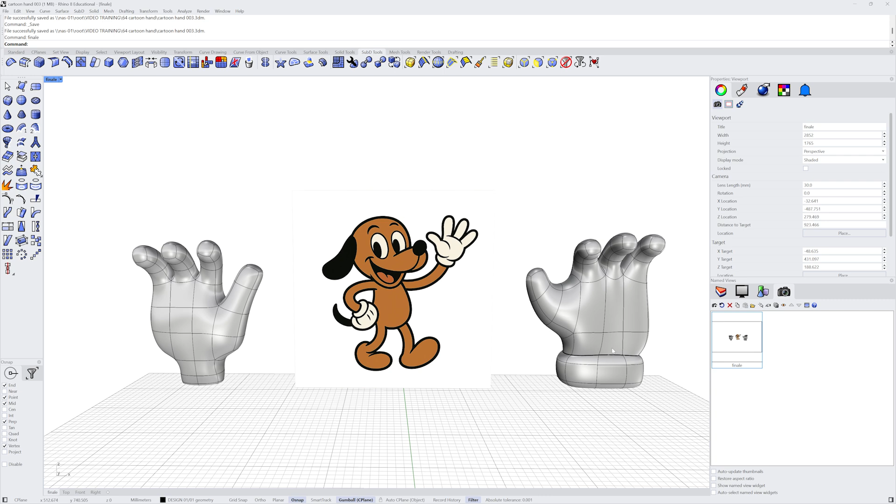Okay, here's the overall character. This is, if you're curious, a style called rubber hose, which began in the 1920s and 30s. Of course, we're just going to focus on that glove. So let's zoom out. So here's two examples of hands. The one on the left is just the basic wrist, and the one on the right has that cuff that we will be building. And it's kind of fun, if you hit the tab key, just to see how simple it really is, kind of under the hood.

So before we get started, I'd like to cover the strategy and commands. We're just going to use two simple commands. We're making a primitive to start off with, and then it'll be a series of extrusions. Now the strategy here is all about the repetition. We're going to be grabbing one face at a time and then extruding. Then we'll be either scaling, moving, or rotating, or all three to get it into the correct position, and then repeat that move. Don't worry, it'll be quick and fun.

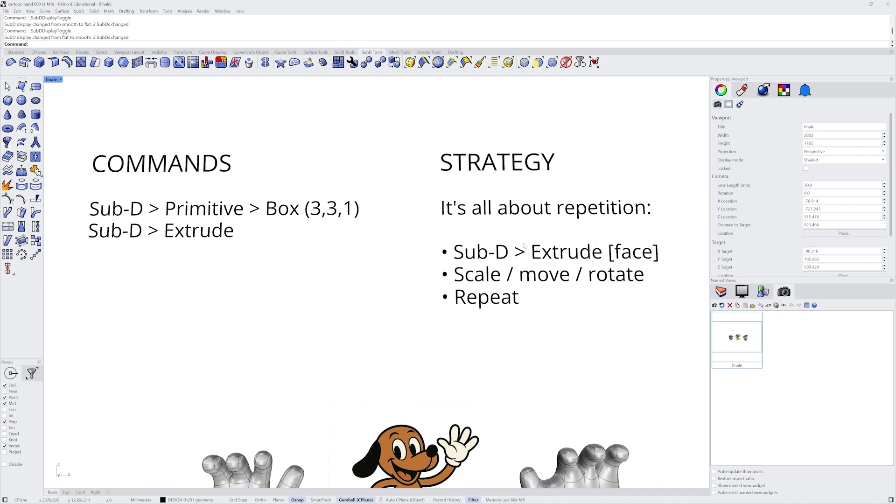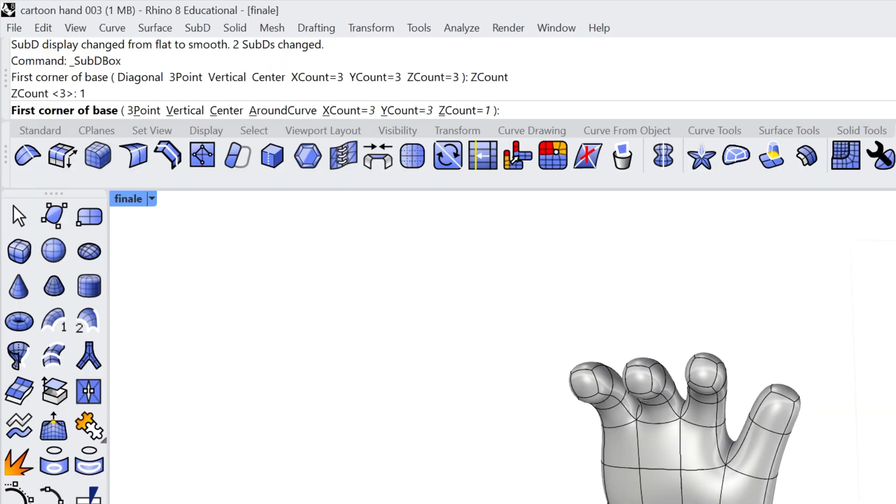So let's come down to the workspace, and I'm going to use the sub-D toolbar and go over to get a basic box. Now I want the X count to be 3, the Y count to be 3, and the Z count to be 1. We're going to make this a flat hand. Okay, we'll just draw the hand anywhere is fine. Kind of get it centered though. We're going to go up. And there's our basic 3x3x1 box. Okay, I'm going to shrink this down a little bit, give ourselves more room to work.

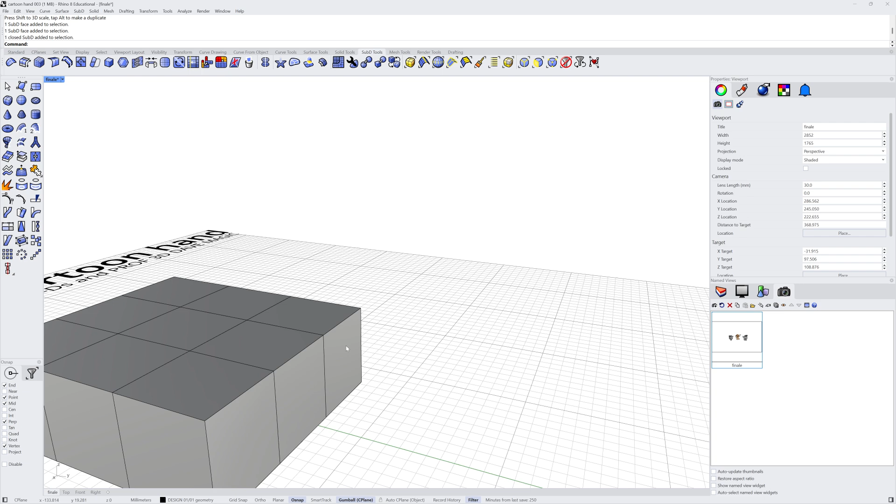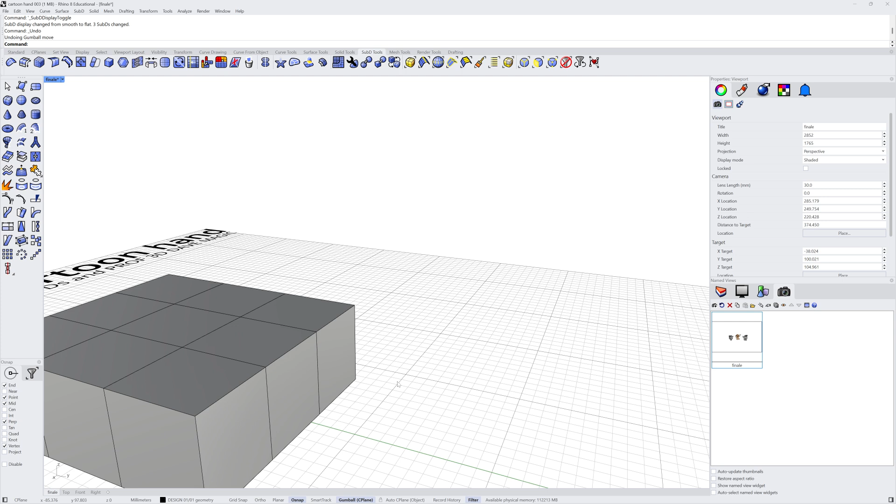So the process is pretty straightforward, as I said. We can select the whole sub-D at once, like I just did, by clicking anywhere. But this is going to require some finesse. We're going to select what's called sub-objects. There are three kinds. There is the vertex. You have to use Control and Shift, and that's editable, and it can move things around, and undo that. We also have the edge. That can be moved, scaled, or rotated. There we go. See how it looks. Control Z to undo. Or the face. So vertex, edge, and face. Control Shift picks the face.

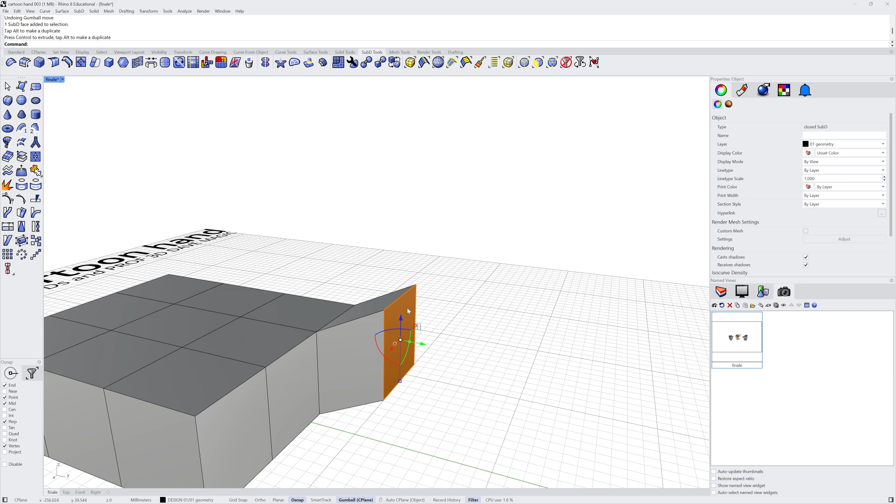And we're ready for our first operation, which is an extrude. Now I'm going to pull these out roughly in a cube form. That keeps it relatively round inside. So after the first extrusion, we want to have the hand curling a little bit. So we're using the move, which is the blue arrow. And then I'm going to rotate just a bit, and that's the red arc. Now notice how it gets a little bit wider. So we may want to scale it in just a little bit. So I'm using that scale there.

Okay. If you're doing this and following along, my gumball is automatically rotated to align with the face. Let me show you where that setting is. So that's align to object. So now it sticks with the face as opposed to realigning to the construction plane.

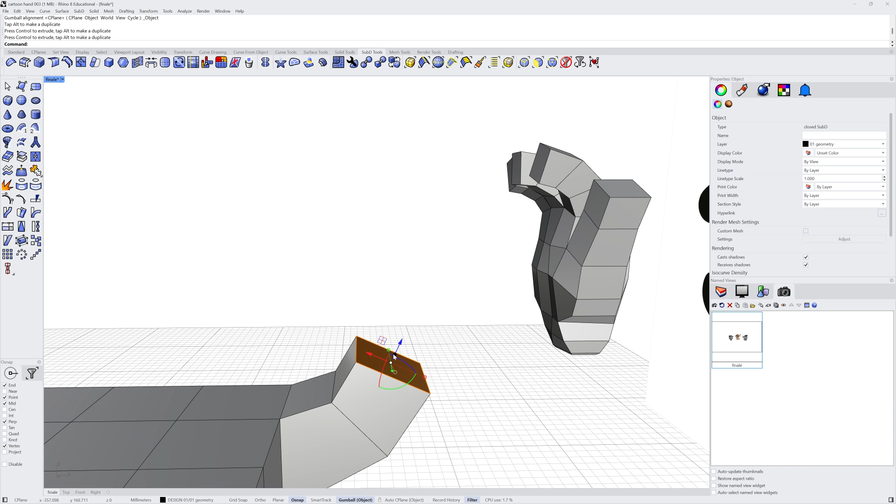Next, extrusion. I'm going to keep it kind of short. And as I said, we're going to do a little rotate. That was a move. And I'm going to have this basically 3 segments. We'll align it. So one more. Bring it over. Arc to rotate. Is that still square? All right, let's see how that first finger looks.

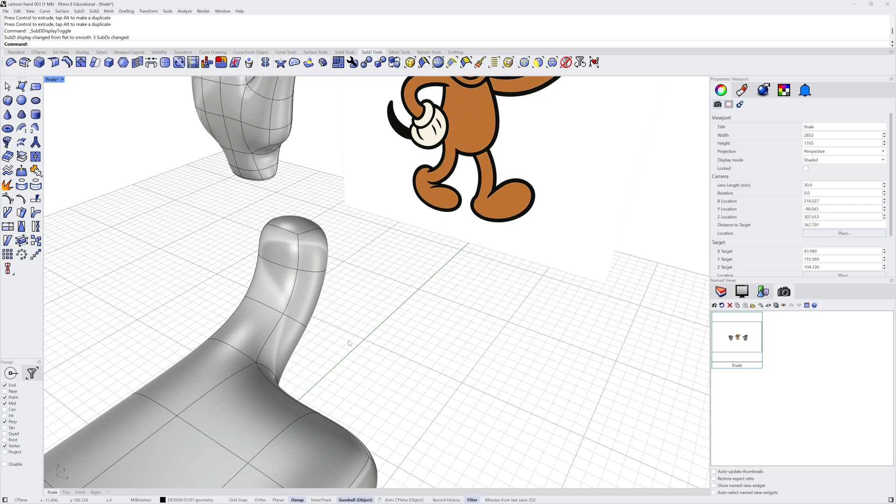Not too bad. Okay, I also like to do these one at a time because if they look too similar or symmetrical, it's not going to be an organic shape. So we'll just keep moving on one by one. That's the way it goes. So this can come out a little bit farther. It's the middle finger. So that was an extrude. Here's a rotate. I'm going to pull it out a bit. Maybe a little more rotate. And maybe scale it in a bit.

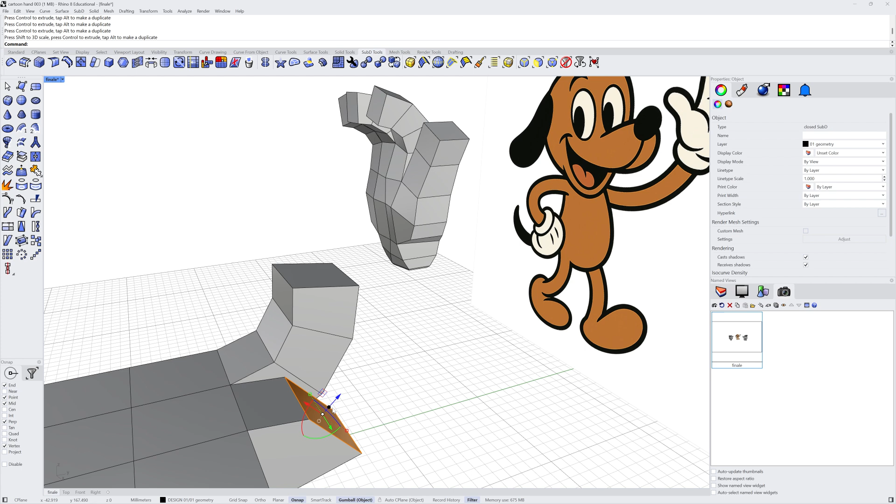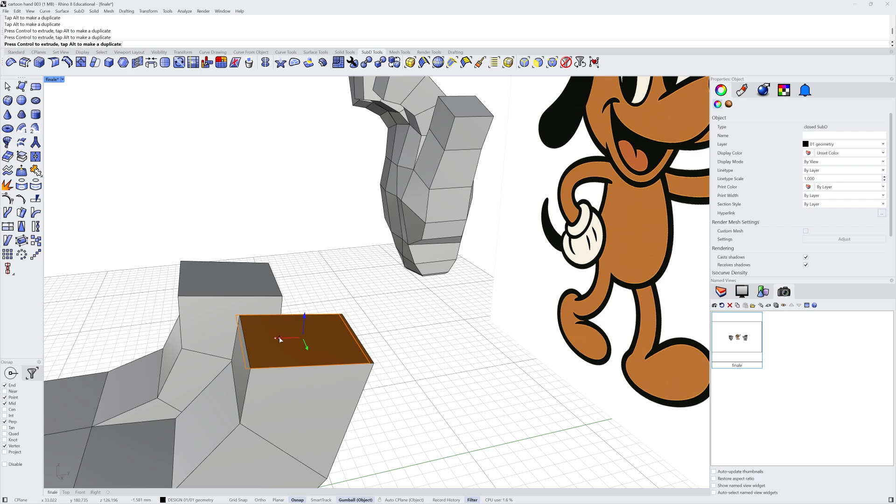Okay, let's keep going. Again, make this one just a little bit bigger and a different angle too, just so it looks a little more interesting and non-symmetrical. That's kind of the whole idea of the organic look. Things don't align precisely. And the third extrusion. Okay, so we'll just maybe move it and then rotate it. It always takes a couple back and forth. That looks relatively square.

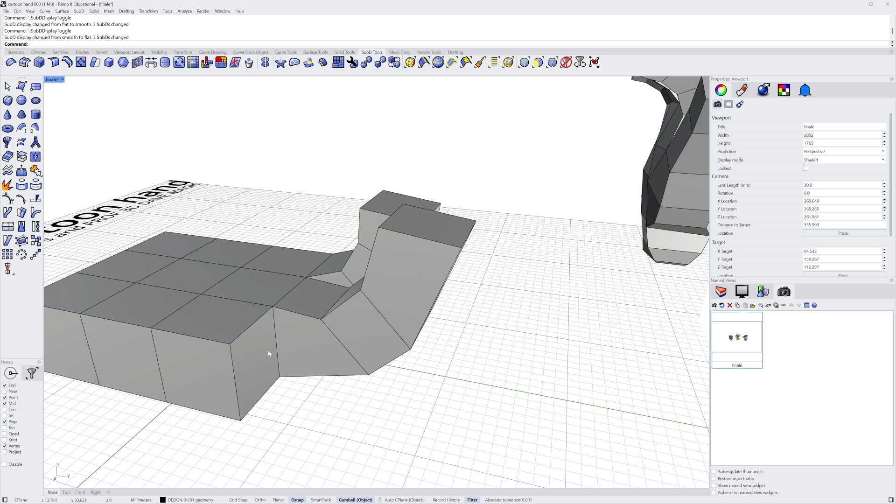Let's take a look at these. Looks like the middle finger is not as high as I wanted it to be. So we'll just move it up. This is not the extrusion. It's just a basic move operation. All right, we've got 2 fingers. How easy can it be? Let's go get the last finger, and we'll do the thumb.

So we'll extrude this out. Maybe move it up a little bit more. Again, the rotate, and as many operations as you need. Just push, pull, push, pull. Over and over and over. One more extrusion. Or two more. Scale that in.

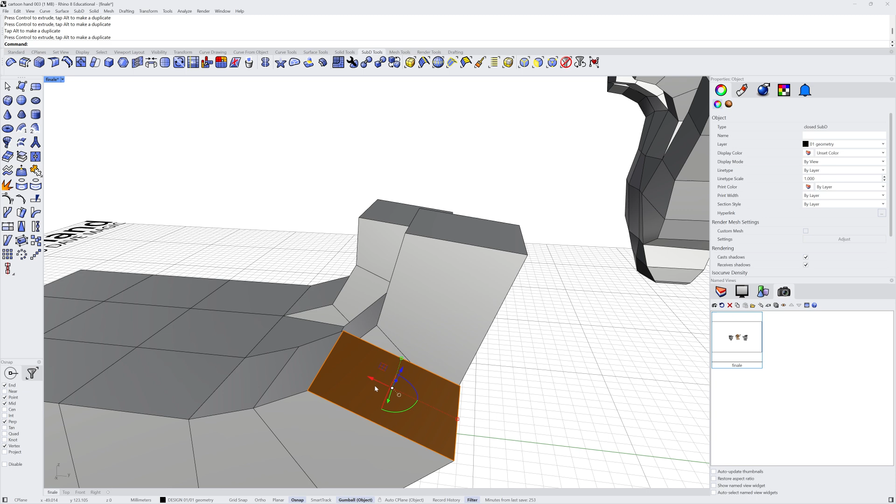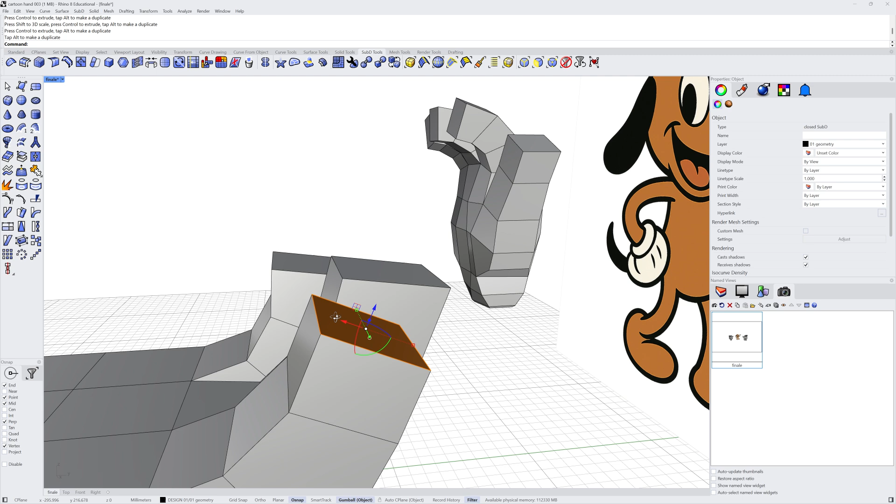As you do this more and more, you'll notice you start visualizing, even though it's kind of a rough, primitive box, but you'll visualize how it's going to look in the smooth form. We'll take a look at that just in a minute. Another thing I like to do is when objects, especially these faces terminate, you typically want to have them rotated so they're kind of level, like so. And so I always like to look at this in the box form and then check it out in smooth form. Again, the key for switching between smooth and box mode is the tab key.

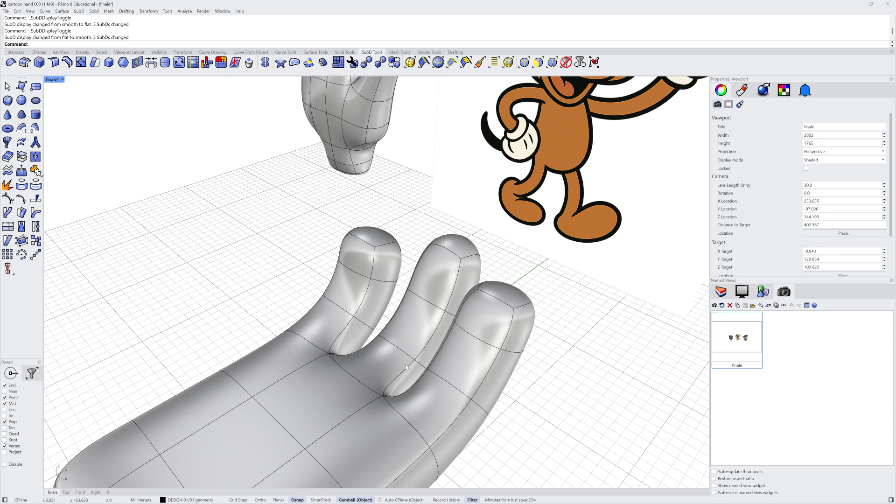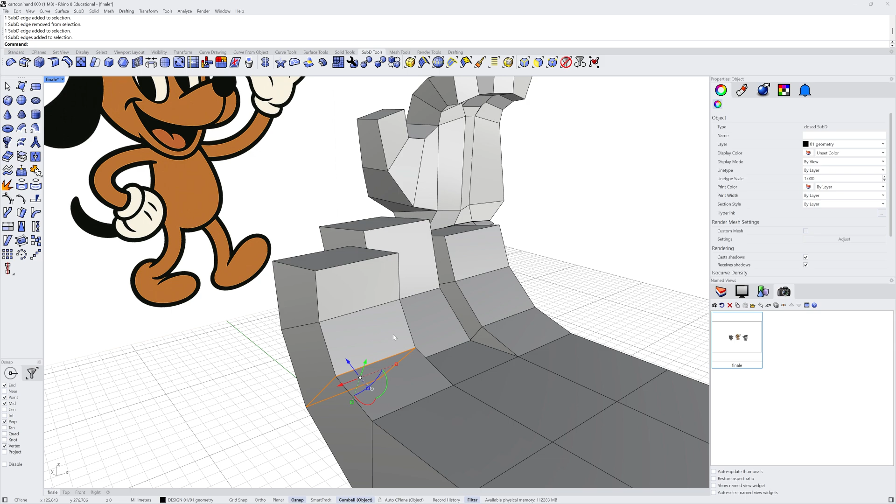Now, if you want to do a little bit of extra stuff, these fingers all come off in the same general direction, straight. So wouldn't it be nice if we could have this finger veer off just a little bit? And that's not too hard to do. So what I'm going to do is double click on this edge here. And by double clicking, you get a loop. Again, this is Control, Shift, and double click. Control, Shift, double click up there. So we've got two of those.

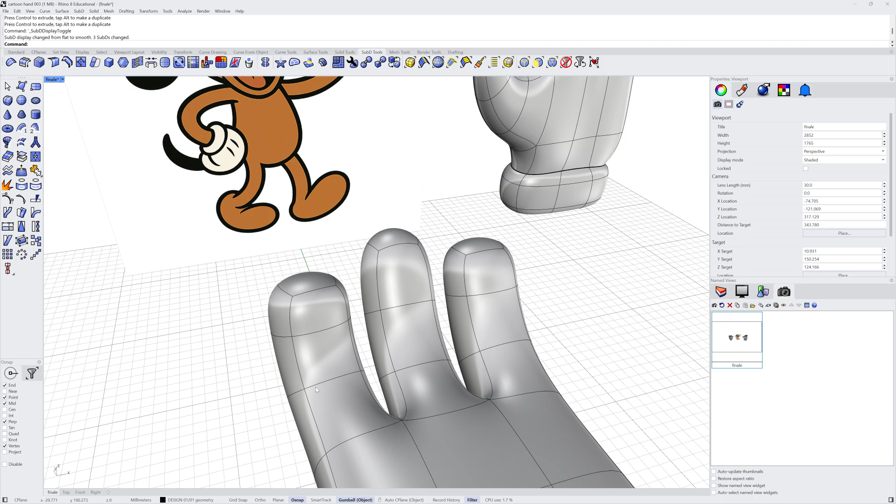Now to get the top one, it's on the end, so we can just pick the face. That's probably the easiest way to do it. And then just scoot those over. And then a little rotation. Slight rotation and another little scoot. So we just have them veering off a little bit, so that looks a little more organic and fun. All right, there's your basic hand.

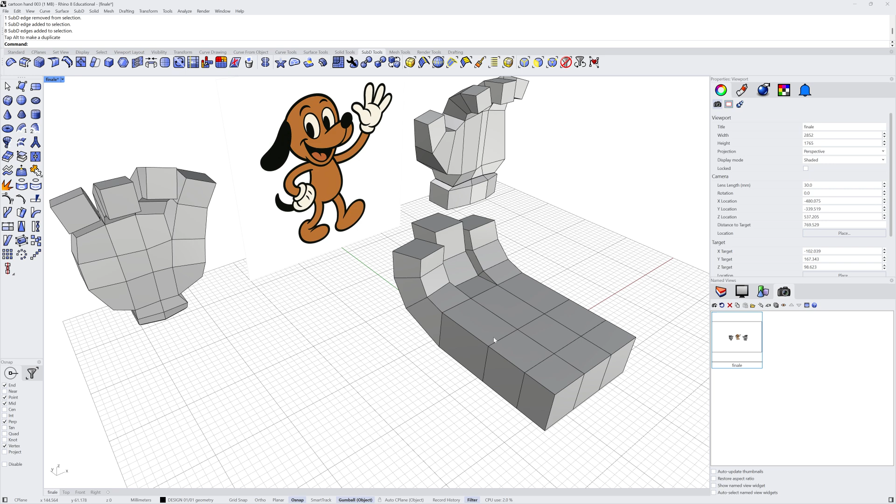I am going to work on the thumb now. So I think we'll pull the thumb. This thumb is actually from two faces, and I think this thumb is from one. Let's match this one over here. So I'm going to double click this and just kind of pull it down. Double click. That gives us a loop of that edge. Pull it down. And I pick this one face, Control Shift picking, and I'm going to extrude it out. Maybe I'll rotate it a little bit and move it. How's that looking?

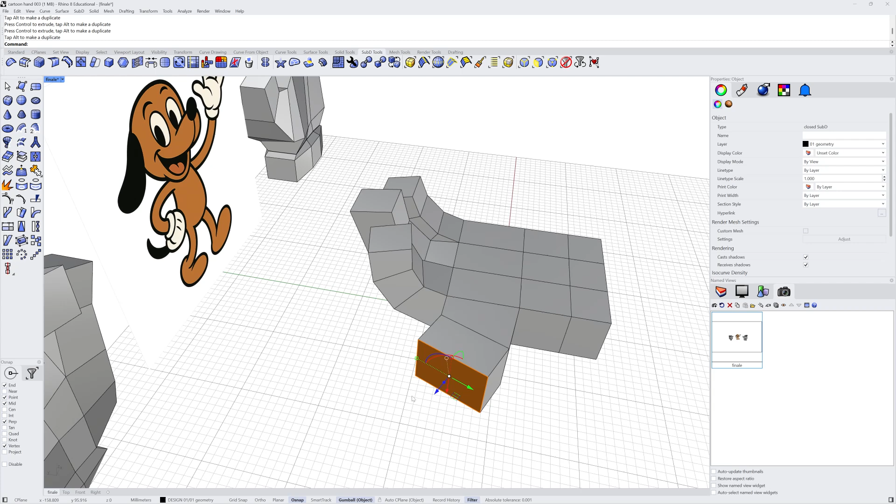I'm just checking this other one over here. Let's do another extrusion. This definitely needs to scale in, so I'm grabbing the green box there and pushing it. And once you push it, you'll know right away, it needs a little bit more of rotation. And so I think we have one more extrude. Keep them short. You can always make it longer. And let's see how that looks.

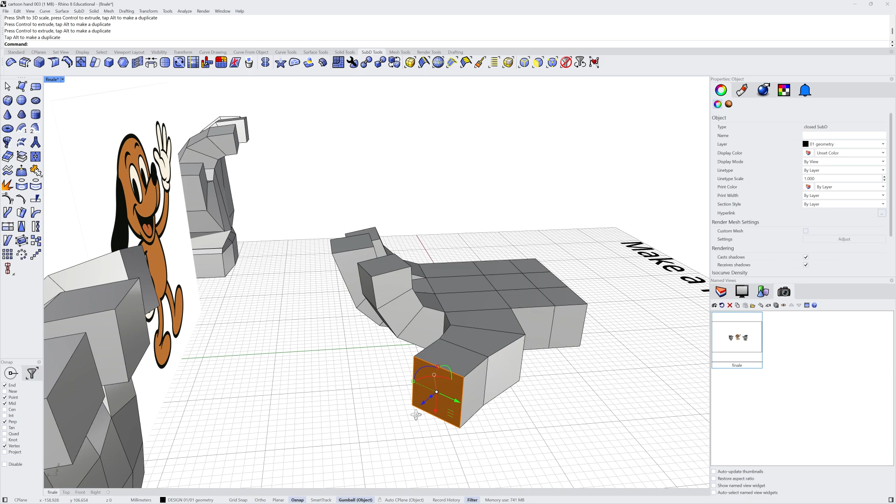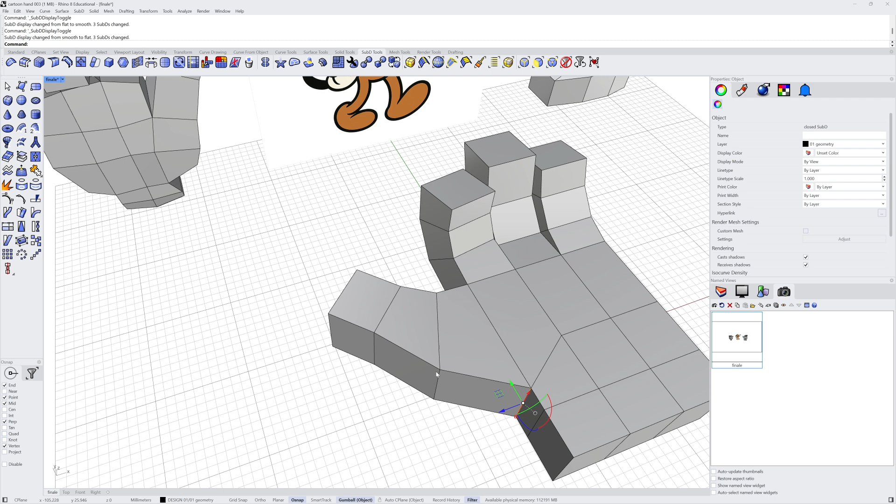Hey, not too bad. So there's a part of the thumb that is much thicker at the bottom. So we can just grab this one edge, Control Shift, and slide that down. There we go. That's looking way better. Now, this is also a good time to notice when things change direction. This goes here and then doubles back in and back out. So you may want to just move that out so it has more of a continuation. Notice that even though it's three straight lines, that's telling me it's going to curve more smoothly. Hit Tab. Fantastic.

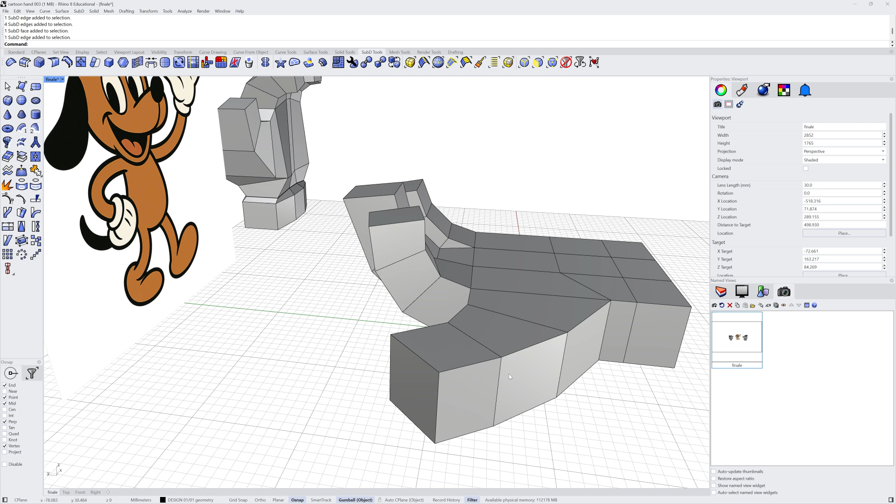We might have the thumb bend just a little bit. It would look weird coming flat. So let's double click to get this. And then the face. Now, just in case you were wondering earlier, if I double click on this edge, it stops at one because it's a terminus. So I can double click a loop internally, but then typically when I get to the end, I just click the face. So that's the way to do it.

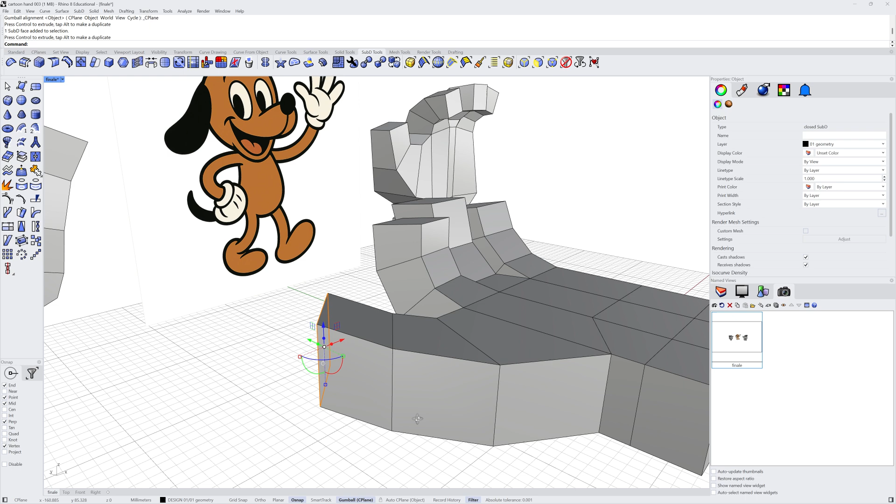Now we have the gumball kind of at a weird angle. So you may want to switch it back to the C-plane and just move that guy up a little bit. So I'm moving two things together, even though I just want to move the face now as the last step. And probably needs a little bit of a rotate. There we go. May want to pull that down just a little bit. All right, let's get to the cuff. I think that's enough work on that.

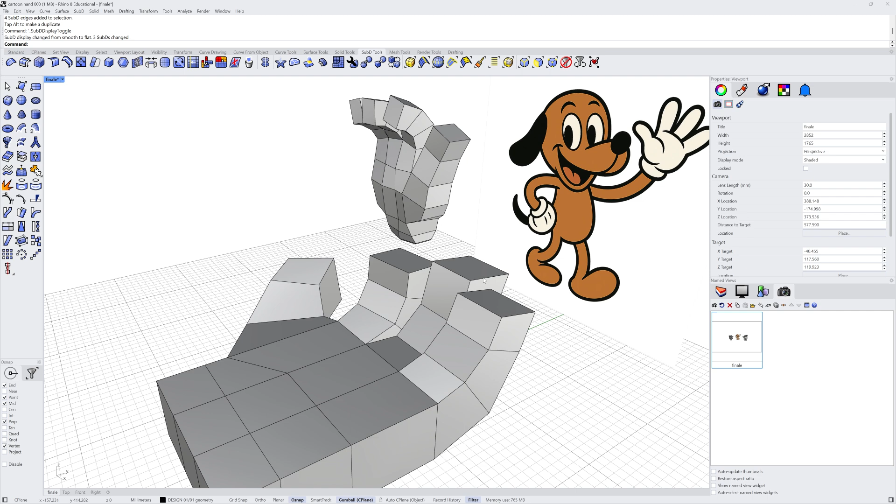You may want to splay that third finger out the same way we did the first finger. You may want to make the middle finger a little bit taller. So all these things are easy to do after it's built. That's the beauty of sub-Ds. There we go. So we're going to get the cuff now. So let's take a look here. So I'm checking this out here. It looks like we had three faces to make the cuff.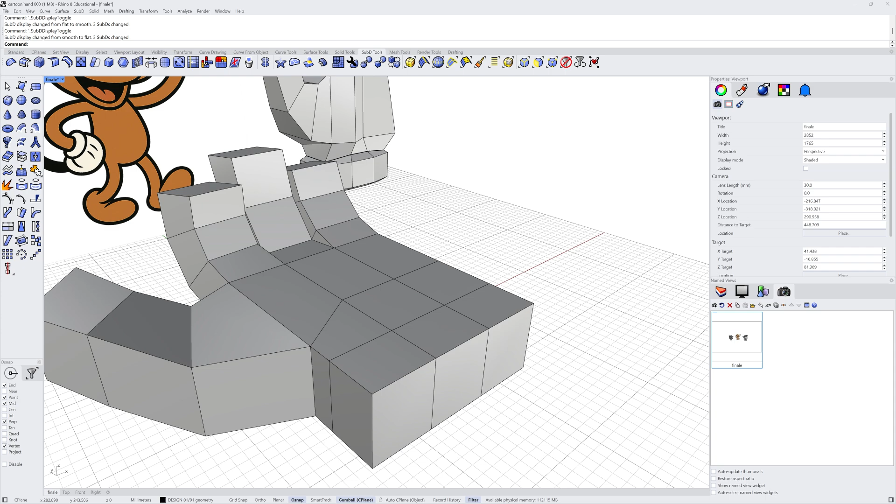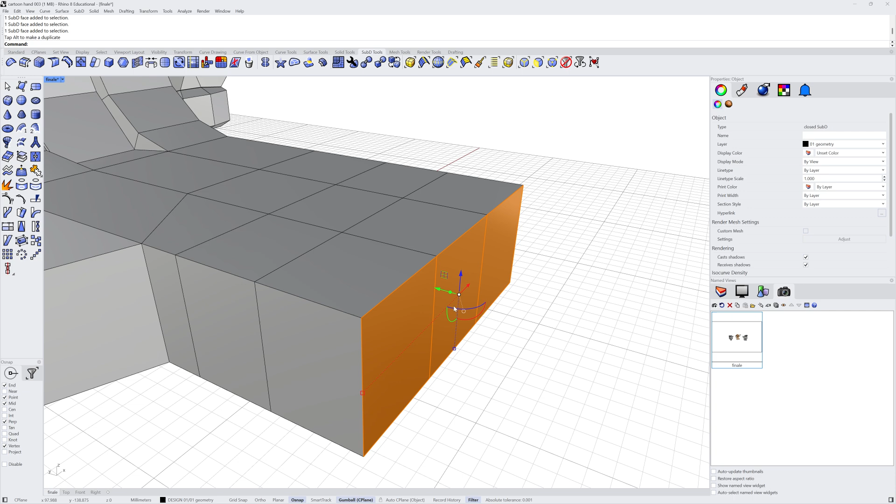So let's use this first face here. So I'm going to pick three faces. Just keep clicking. And this will be our transition. So this will be the slope. The next thing I extrude will be the center, and then we'll have another slope back down. So extrude out. And then one more short extrude. Now, there's a lot more work to be done here, but let's just take a look in the smooth mode.

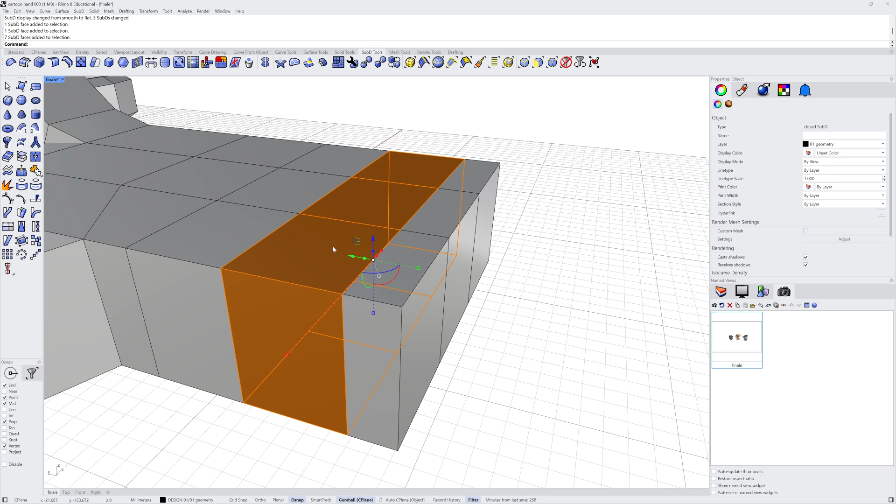Yep, looks horrible. Another way to select multiple entities is we can loop faces. So I'm going to click on this face here, Control-Shift-Click, and then click the next one over, double-click, and look at that. We get a loop all the way around the object. That is pretty handy. So I'm going to scale those up, up, up, and out, like so.

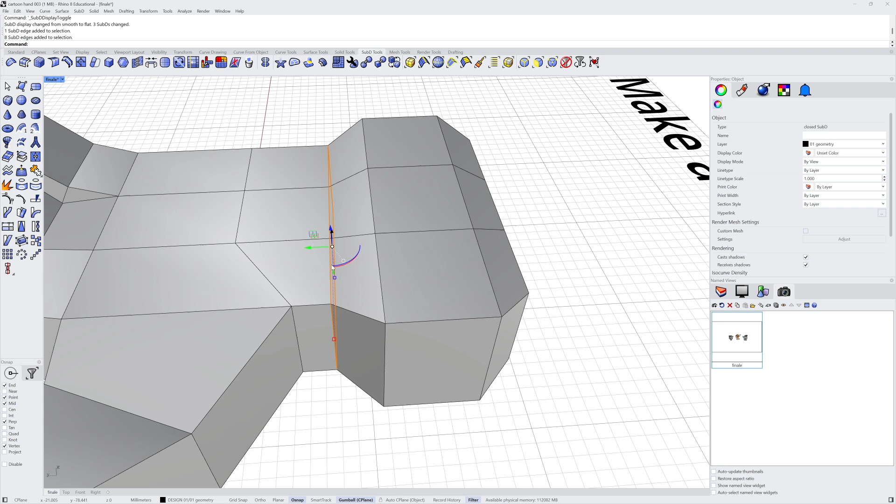And then kind of move them towards the center. This is the whole idea of making this little cuff. Let's see how that looks. Yeah, not so good. Let's take this part here. I'm going to move that back in a bit. Now it's looking a little bit more similar or symmetrical to the other side.

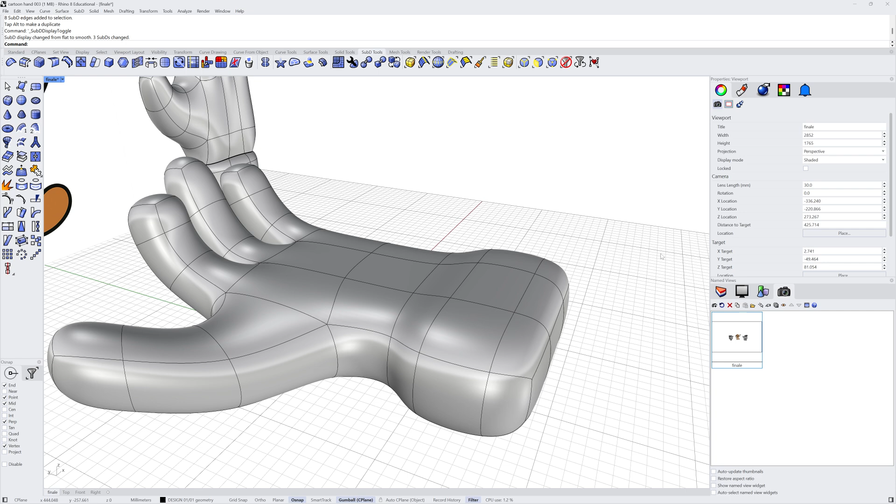But notice with SubDs, they always want to be smooth. So every time I go over here, it's just blending, blending, blending. And if we look at the other one, there's a nice crease. And so that's the name of the command, how we can get a little more extra detail in this section here. So I double click. That's an internal loop, so it goes around. And then up here on SubDs, we have hard crease, which is a right click.

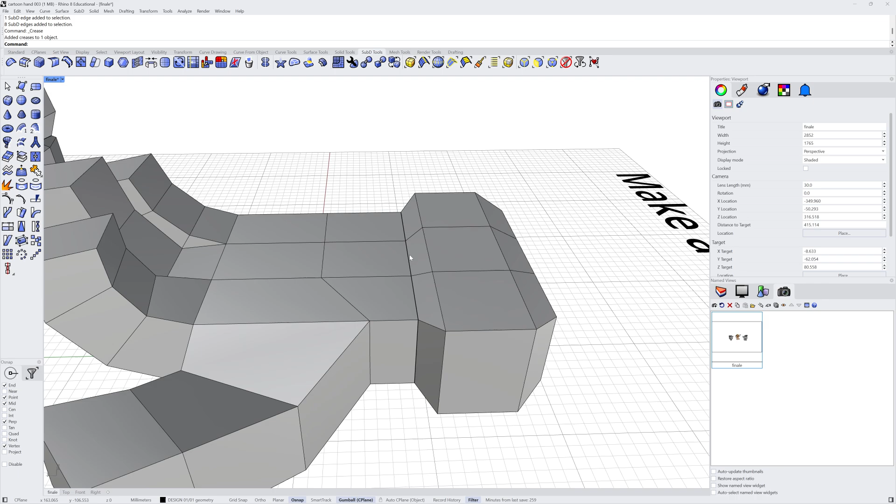Now, it looks the same in box mode, but you may notice that it's a little bit darker. So let's hit the Tab key, and there you go. That's a nice little crease there.

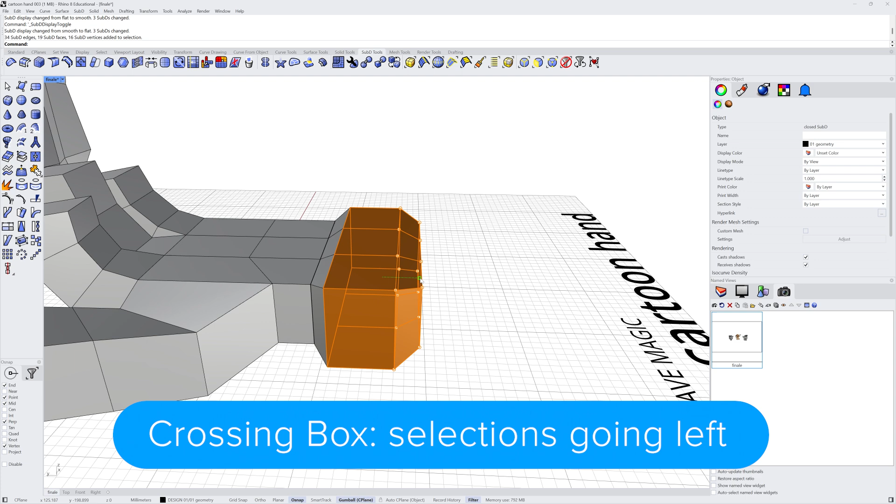So this part may want to, let's see. You can also grab a combination section. So I'm going to hold down Shift and drag a box around there. So I've got a whole bunch of stuff. I'm just going to scale that in a bit. Now it's scaled back away, so I can just push it back in. So that's another way to select stuff, is doing a crossing box. What do you know?

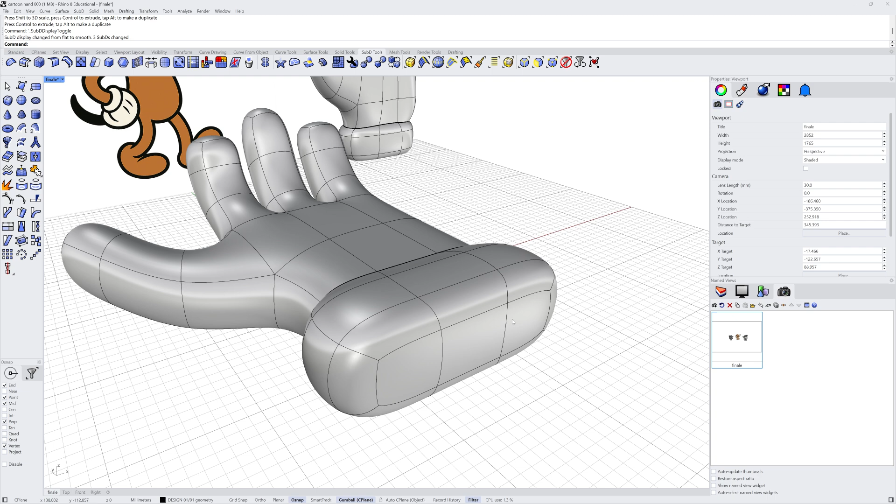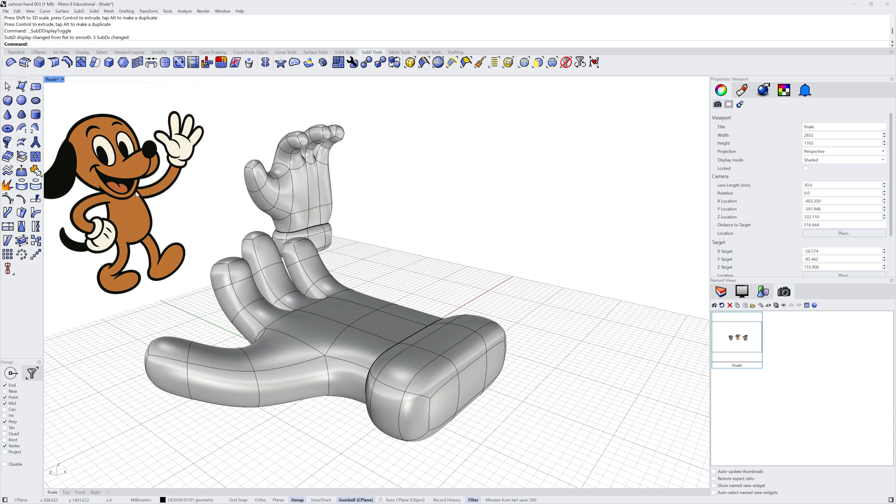Okay, I think we're pretty close to being done. You might want to make the wrist a separate piece, or even put a crease here. So a couple of ways to go. If you want to have the wrist continue to be blended here, I think actually based on this cartoon, I would have a separate piece of geometry for the arm. That could just be a single curve and then do a pipe operation on that. Or in SubD terms, the multi-pipe.

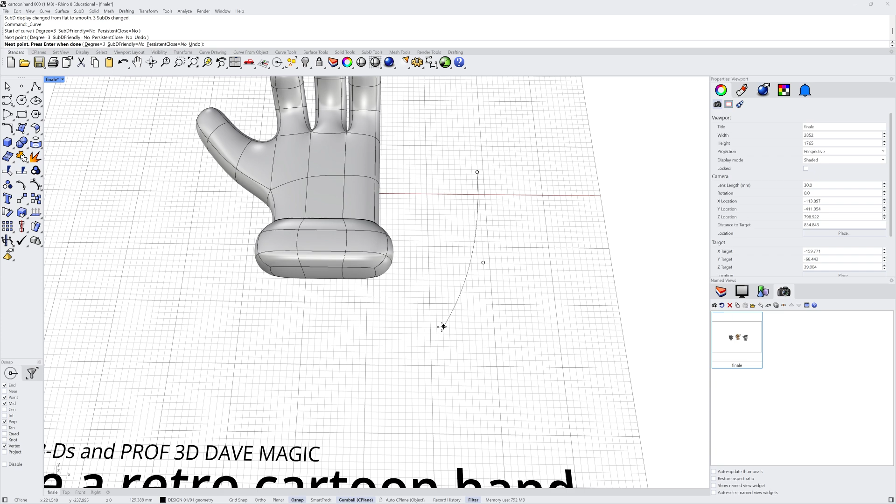Okay, I'll do it. So with the multi-pipe, we're going to draw just a basic control point curve, which is the smooth guy right here. And I'm going to do it kind of on the side so I don't snap to anything. Okay, so there's your basic curve. Let's get that into position and move it down. That's on the ground plane or the grid, so I'm going to move it up to the center there.

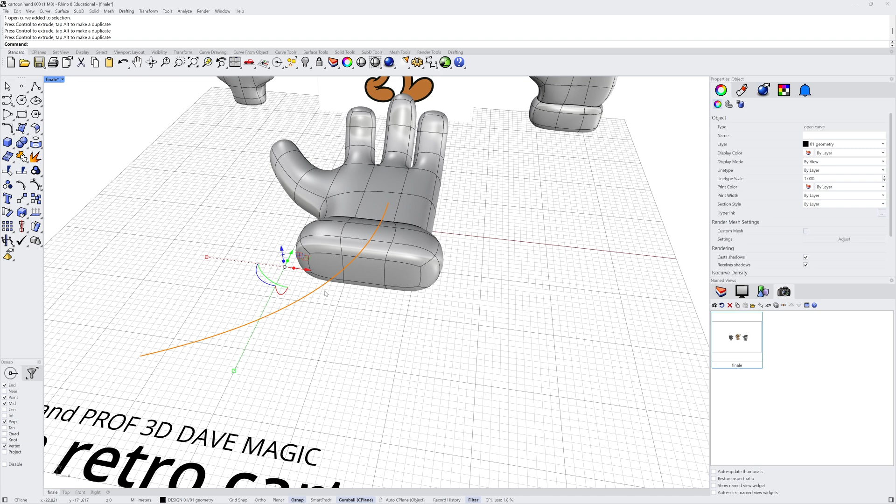And this is a really good strategy to make things from separate objects. I'm going to maybe scale that down just a little bit and move it over. So it looks like it's entering the center where the wrist should be.

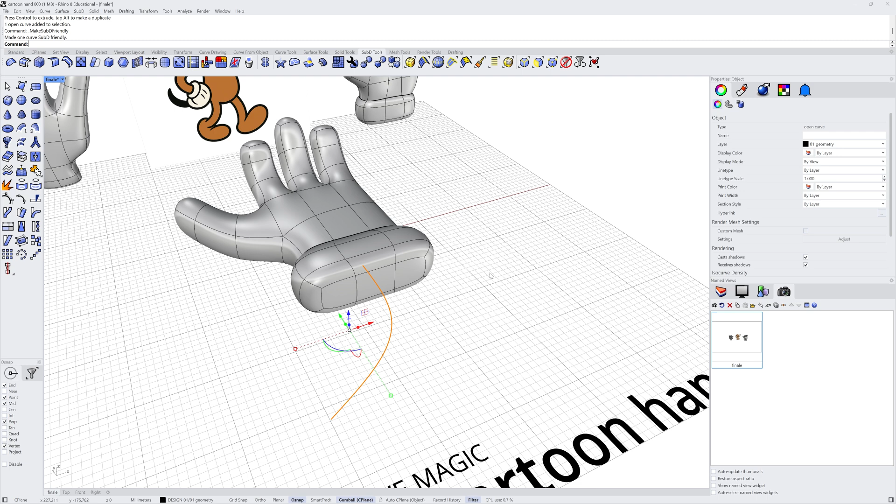Okay. So anytime you use curves with SubDs, they need to be run through this special command called Make SubD Friendly. So let's go to the SubD tools, and that SubD Friendly command is right there at the very end. So I'm going to left click. You'll see it change just a little bit. If it's closed, you'll see no change, but open curves will sometimes jump a little bit. So you can always go back in there and make a slight little tweak as needed, or leave it alone.

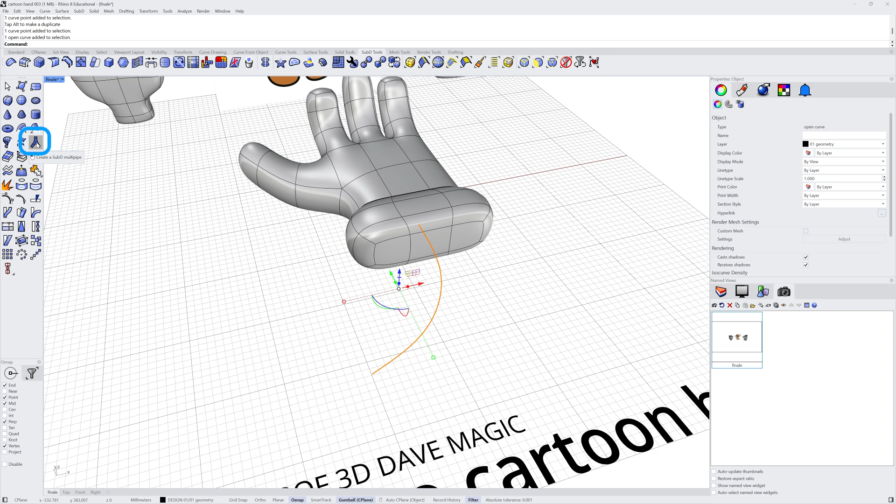Anyway, we're ready for the final step here, which is called the multi-pipe. And it's right here on the SubD sidebar. Now, the radius is way too small, and the struts, I like to lower those down. Those are the number of edges between each of the control points. So we can actually lower those down. 0 will add no more.

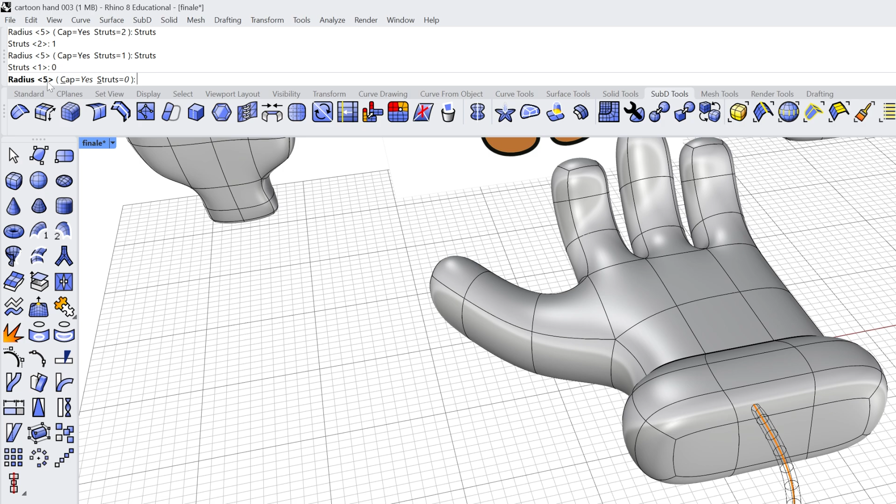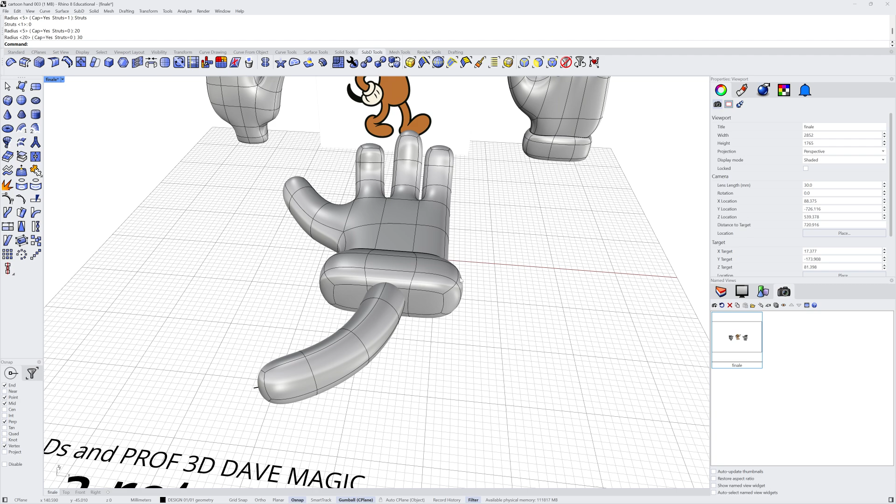Now the radius is way too small. Let's try 20. So we're getting closer now. 20, maybe 30. We'll leave it at that and right click. And so that's the beauty of drawing with curves. Just make them SubD friendly, but then you can use that multi-pipe command and play around with the settings. You didn't have to make any decisions until later.

One last thing, I keep thinking of more things here. This needs a lot of extra tweaking. So one thing I'm seeing for sure is the hand maybe needs to come out. So we can just grab that there. There you go. That's looking way more hand-like.

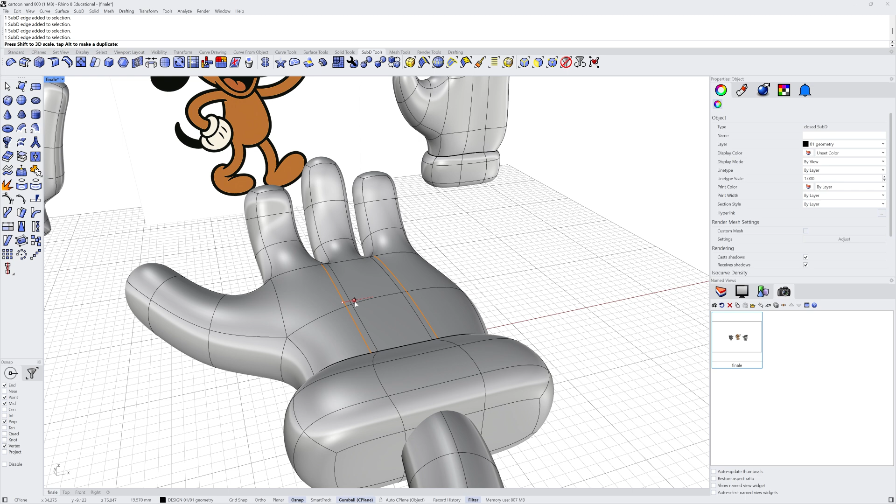And maybe in the middle, we take these two curves, and I'm going to tighten them up just a little bit with a scale in. And then just pull them down a little bit. That's all, just to give a little more of a variety. So there's a bit of a rounded part on the thumb and then another part on the other side of the hand.

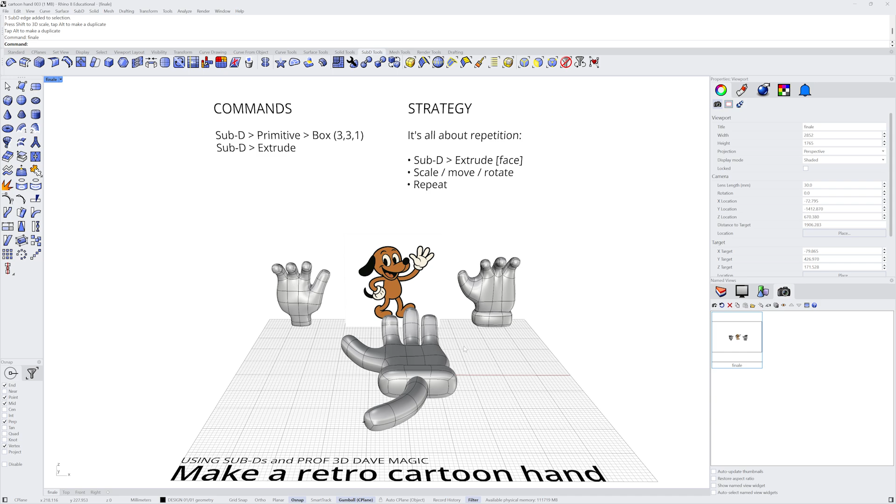So there you go. We've made a cartoon hand with just a single primitive box and then a series of extrusions. So remember, this is all about repetition and playing with the forms until they're exactly right. So there's never going to be just the one exact linear process. It'll be a lot of back and forth and experimenting, but that's the beauty.